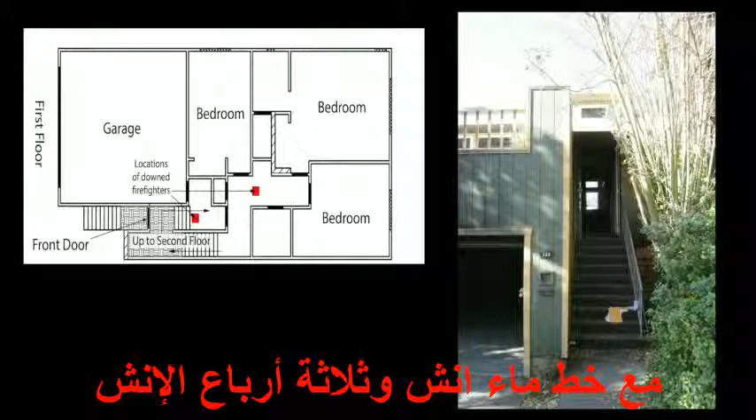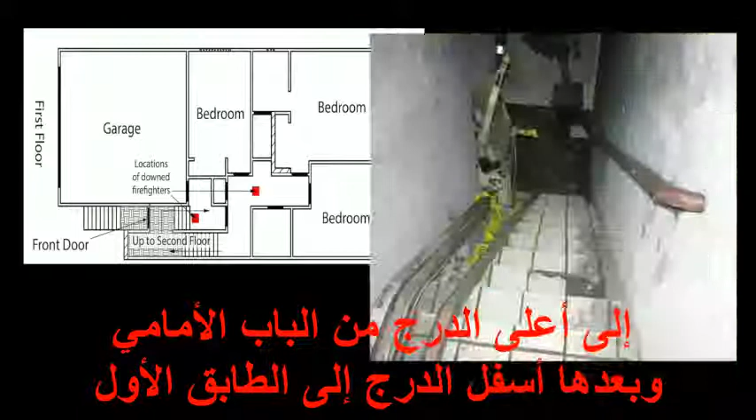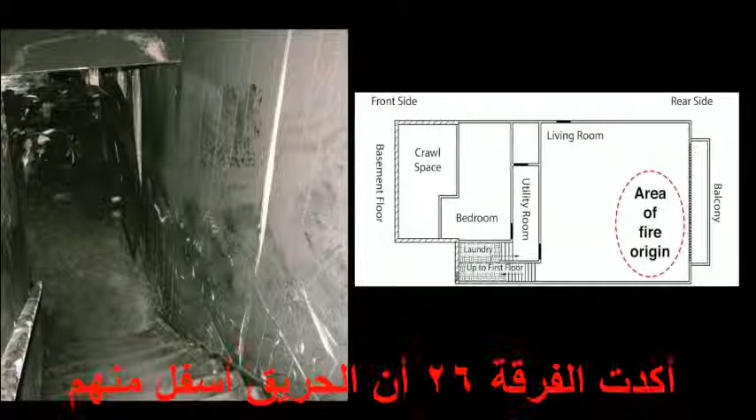At approximately 10:54, about 6 minutes after the arrival of Engine 26, Battalion Chief 9 followed the Engine 26 hose line up the front stairs, into the front door, and then down the stairs to the first floor or street level of the house. Battalion Chief 9 had a face-to-face discussion with the victims. During this discussion, Engine 26 confirms that the fire is below them, and Battalion Chief 9 indicates that the attack will be made from the basement level on the B side. The battalion chief exited the building.

Engine 26 remained in position near the top of the stairway leading into the basement. This was the last communication with the Engine 26 crew members inside of the structure.

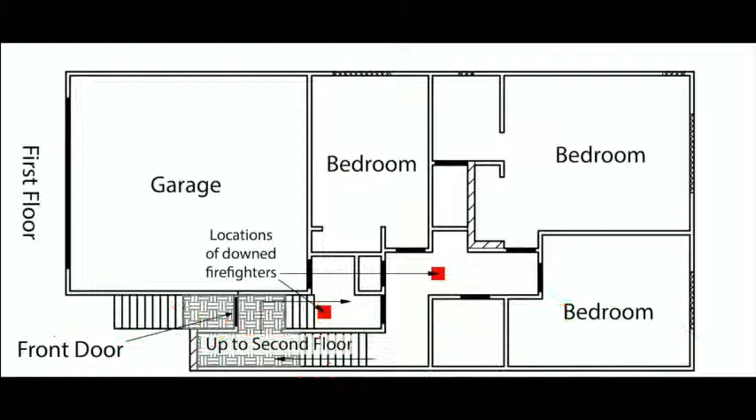Within 11 minutes of Engine 26's arrival on the scene, the large windows that made up most of the Side C wall of the basement level began to fail due to heat from the fire. As the windows broke, fresh air mixed with hot fuel-rich gases in the basement, which increased the heat release rate of the fire. The increase in heat release rate resulted in the rapid failure of the 6 window panels. It took less than 2 minutes for all of the windows to fail.

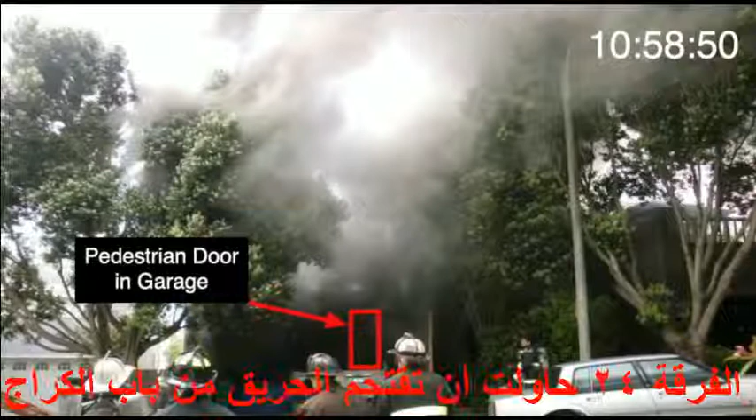After the rear basement windows began to self-vent, Engine 24 and Rescue 1A tried to make entry through the pedestrian door in the garage to attack the fire, but they were forced back by extreme heat and heavy black smoke. With the pedestrian door between the garage and the first-floor hallway open, heavy black smoke began flowing out of the open garage door at street level on Side A.

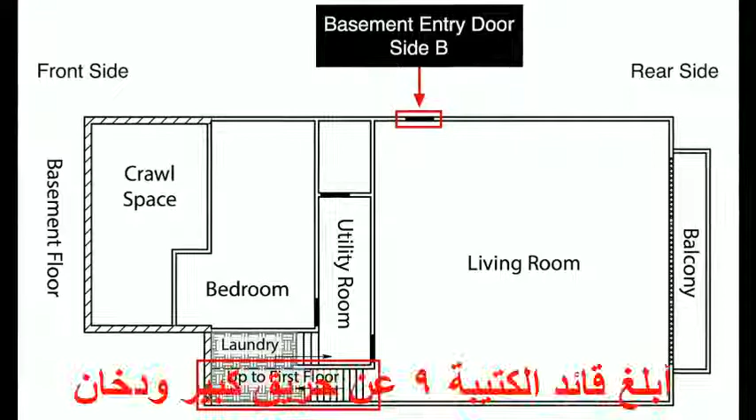Within a minute of this change, the Side B door on the basement level was forced open. Battalion Chief 9 reported heavy fire and smoke. Engine 11 tried to make entry into the basement, but they were forced back by the heat. Battalion Chief 9 requested a second hose line.

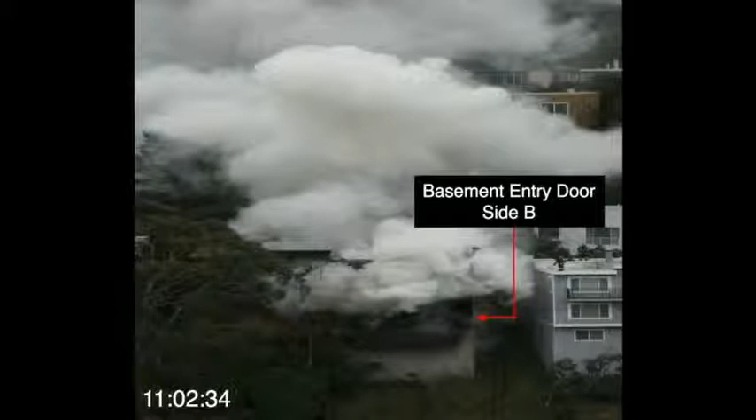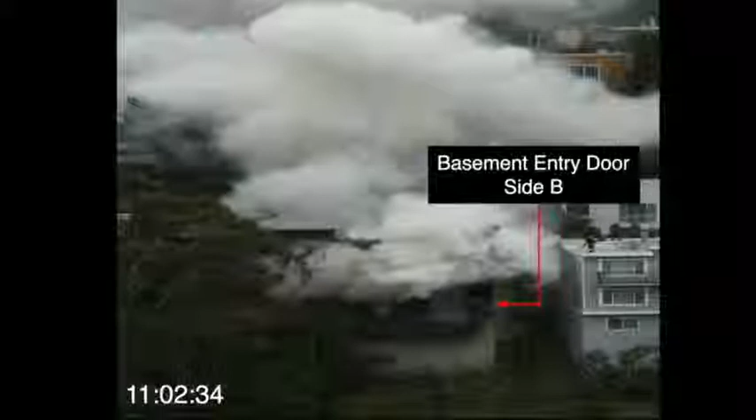Incident Command attempted to contact Engine 26 several times via radio, with no reply. By 11:02, both Engine 11 and Engine 32 had made entry through the Side B door into the basement and initiated suppression operations. At approximately 11:08, the lieutenant and firefighter paramedic from Engine 26 were found in the first-floor hallway between the top of the stairs from the basement level and the door to the garage. Both of the Engine 26 crew members died of their injuries sustained in the fire.

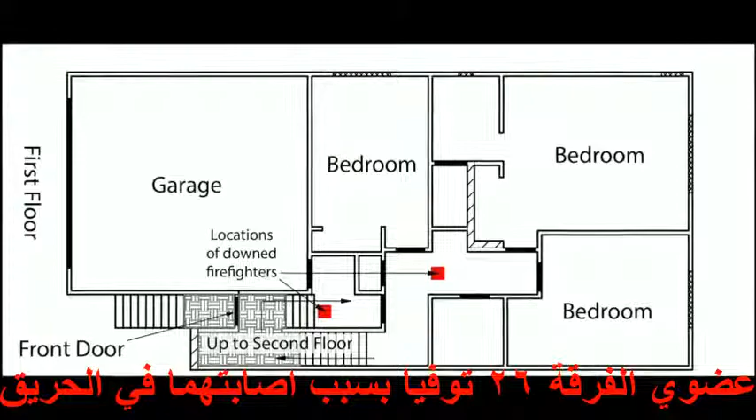NIST's Fire Dynamics Simulator, or FDS, was used to provide insight into the dynamics of this structure fire. The results of an FDS simulation are visualized with another NIST program called SmokeView. The inputs and details for the FDS simulations are documented in NIST Technical Note 1856.

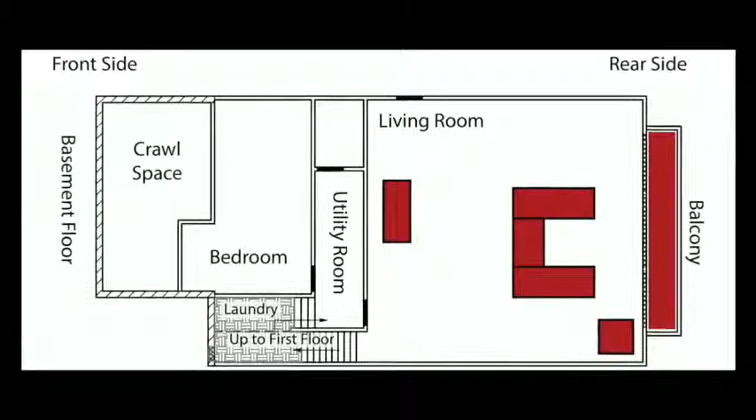The fire started in the basement, near the balcony windows on the rear of the structure. The fire spread to a large sectional sofa in the center of the basement living room area. Based on an assessment of the fuel load in the burned area of the basement, the estimated peak heat release rate of the furnishings and interior finish was approximately 20 megawatts.

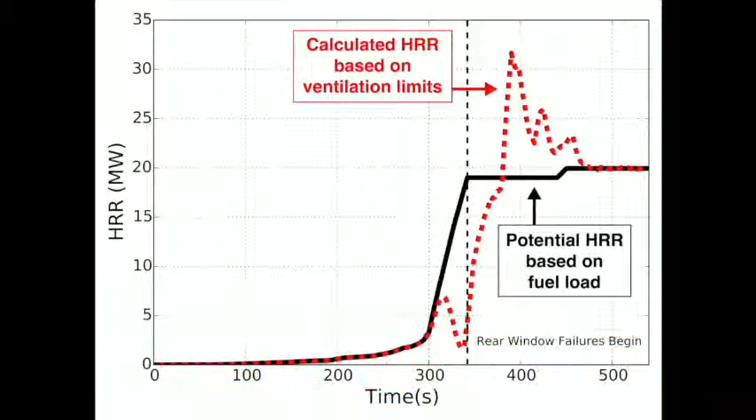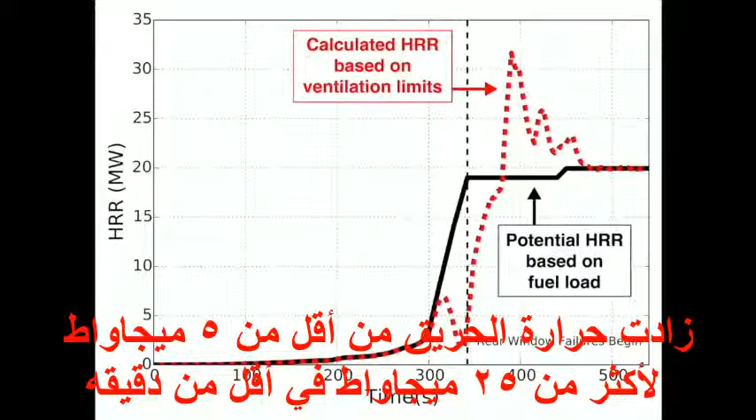However, the lack of oxygen limited the fire growth until the rear basement windows vented. As seen in the heat release rate graph, after the windows failed and allowed additional oxygen to mix with hot fuel gases in the basement, the fire rapidly increased from less than 5 megawatts to more than 25 megawatts in less than a minute after the first window self-vented.

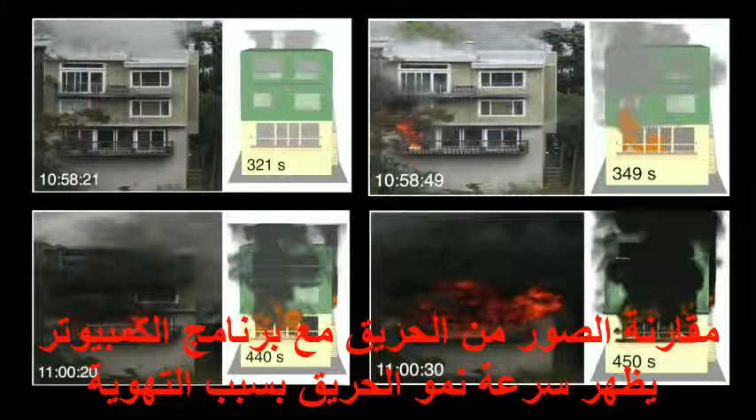The comparison of photographs from the incident and images from SmokeView shows the rapid fire growth initiated by the uncontrolled ventilation of the rear basement windows. The photographs show the fire incident time, while the SmokeView images show the simulation time. The comparison of a photograph from the incident and from the simulation shows the condition on the front side of the house at street level, as the rear basement windows were self-venting.

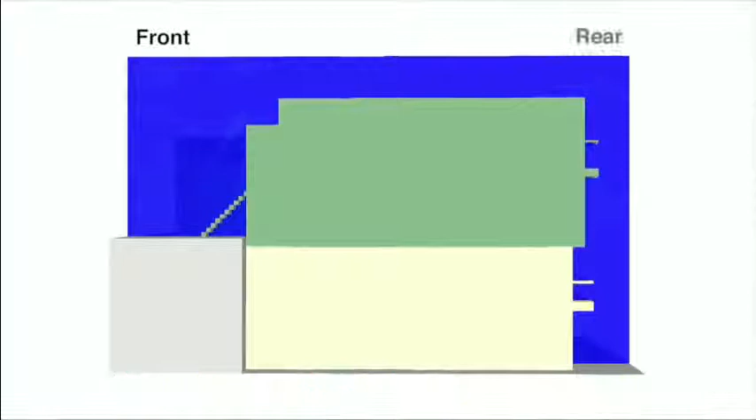Now we will use output from the simulation to understand the flow path within the multi-level structure. Fire gases move from regions of higher pressure to regions of lower pressure. This video shows the pressure plane along the center of the stairway, from the basement to the laundry room landing between the basement and the first floor.

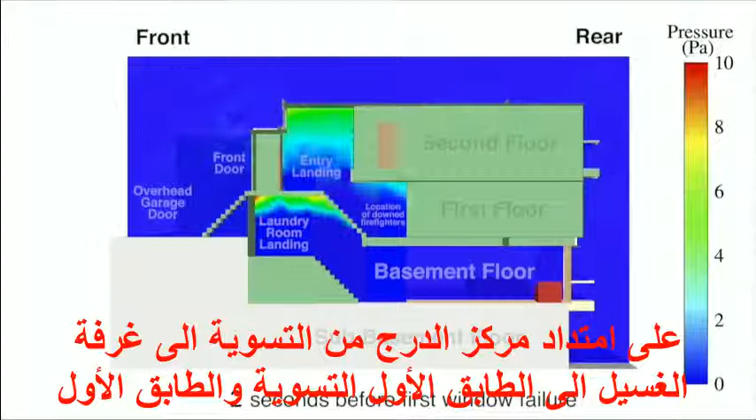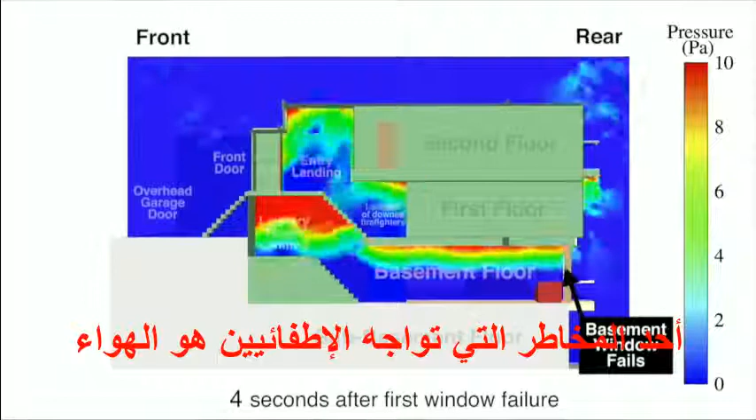An estimate of the pressure increase is shown before and after the first basement window failed. This video shows the pressure plane along the center of the stairway, from the basement to the laundry room landing between the basement and the first floor, with an estimate of the pressure increase shown before and after the first basement window failed.

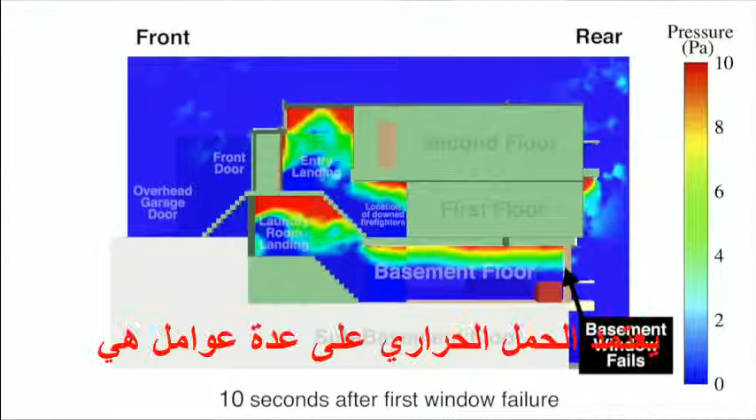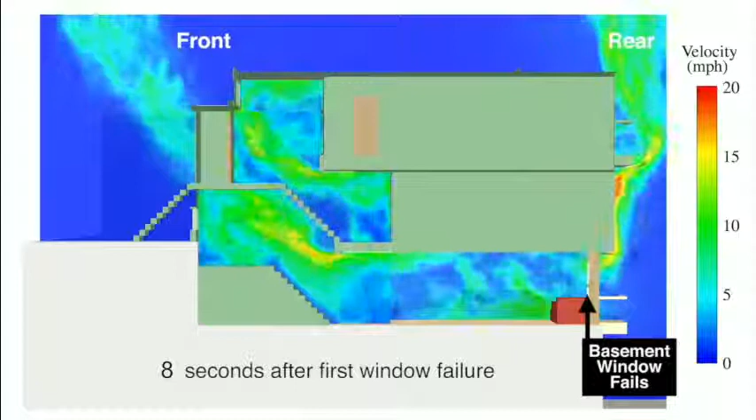One of the hazards to firefighters located in the exhaust portion of the flow path is convective heat transfer from the fire gases. Convective heat transfer depends on the velocity, the amount of turbulence, and the temperature of the fire gases. This video shows a comparison of gas velocity estimates in the stairway before and after the basement windows self-vented.

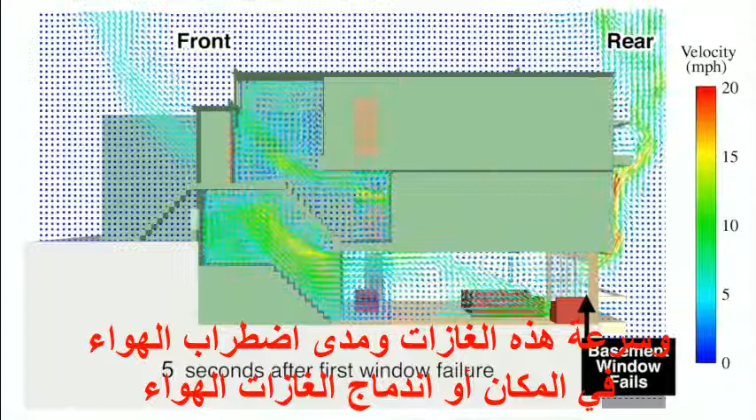Another way to visualize velocity with Smokeview is by using arrows or vectors. In this video, the vectors show both gas flow direction and gas flow speed. This is also representative of the amount of turbulence or mixing within the flow path. Notice the gas flow circulation pattern on the landing, which indicates a very turbulent or well-mixed flow.

This video shows the calculated change in gas temperatures as a result of the fire's rapid increase in heat release rate before and after the windows self-vented.

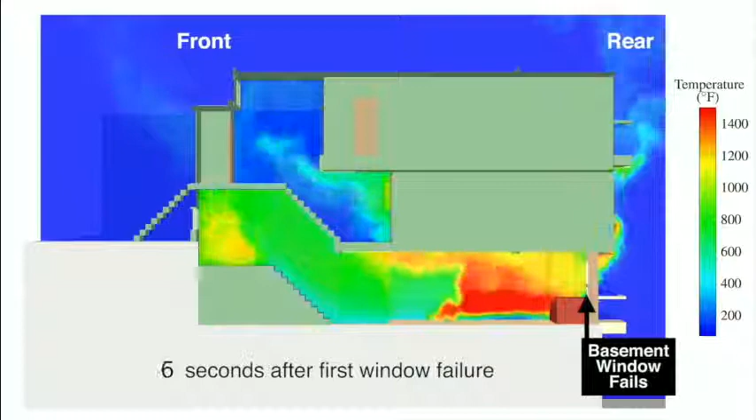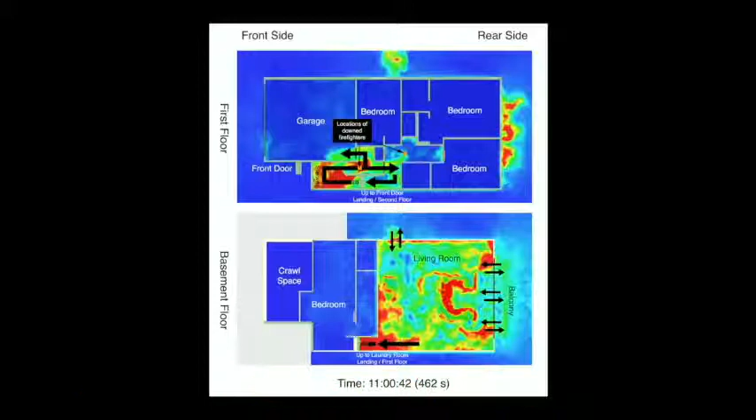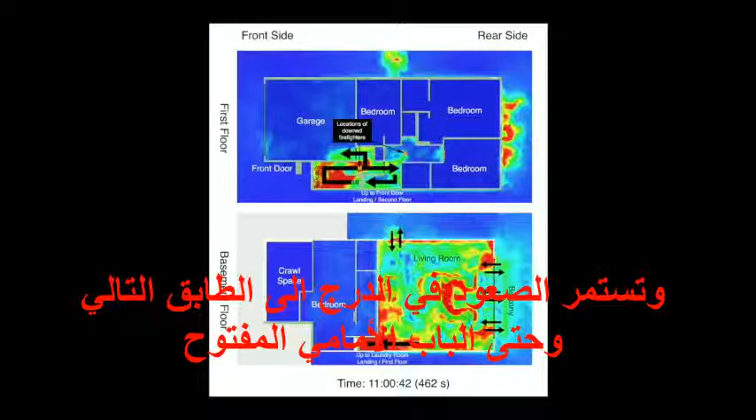These images show the flow path from the fire on the basement level 2 minutes after the first basement window failed. At this time, all of the rear basement windows have failed. The hot gases in the basement are flowing up the stairwell, then splitting on the first floor, with some of the flow continuing up another stairwell to the open front door, and the rest of the hot gas flow moving out of the open pedestrian doorway through the garage.

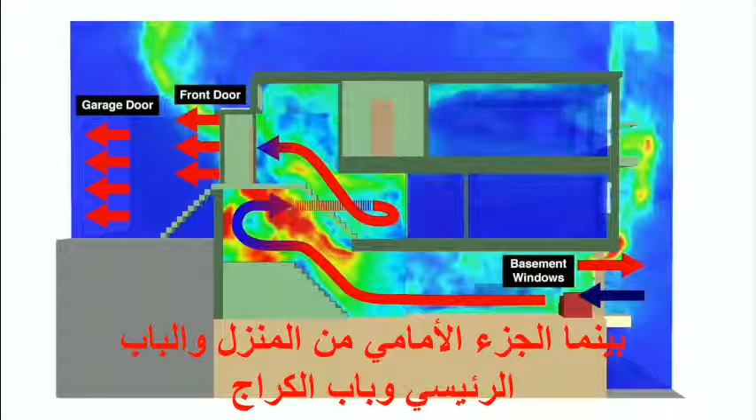Notice that the open basement windows on the rear of the house serve as bidirectional vents, with fire gases exiting the upper portions and air entering the lower portions. While on the front side of the house, the front door and the door to the garage are unidirectional vents, serving only as an exhaust for the fire gases.

There have been many previous fire incidents in which changes in the flow paths have had an adverse impact on firefighter and occupant safety. Fires with rapidly developing or changing flow paths are a significant hazard to firefighters.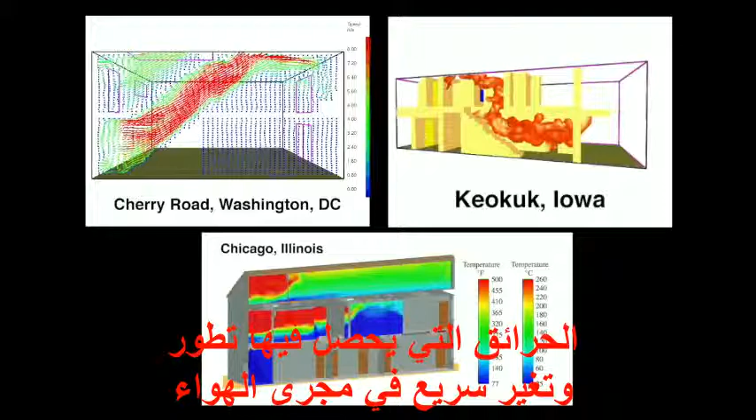The development of a flow path could be caused by the failure of a component of the structure, such as a door, window, or portion of a ceiling, wall, or floor.

Environmental conditions, such as wind, can generate hazardous thermal conditions within a flow path. Stay upwind of the fire or keep the wind at your back. Uncoordinated ventilation or uncontrolled doors can also be the cause of increased thermal hazards within a flow path.

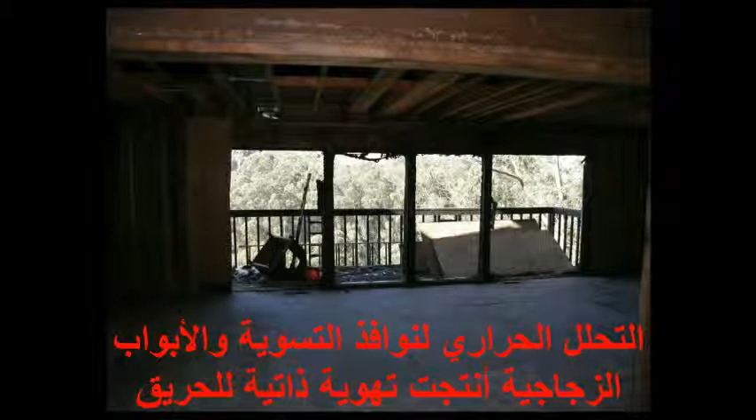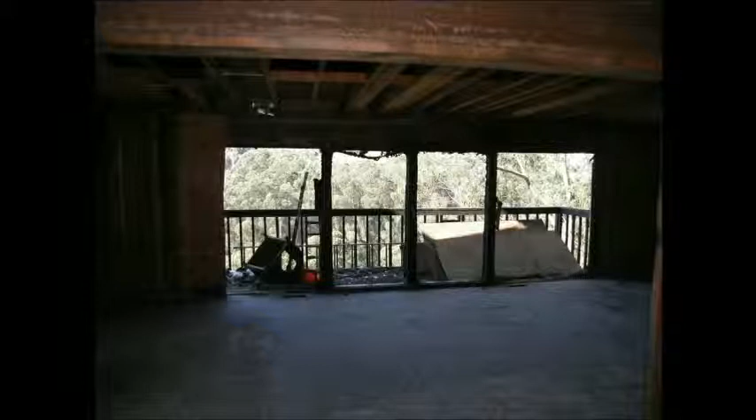In this fire incident, the thermal degradation of vinyl-framed windows and sliding glass doors resulted in the self-venting of a wall of windows 19 feet wide on the rear basement wall. The window opening allowed hot gases to flow out of the windows and mix with oxygen, which enabled the fire to spread up the rear of the structure.

Oxygen entrained into the structure enabled additional fire growth in the living room area of the basement. Failure of the rear windows resulted in a rapid increase in temperature, velocity, and mixing of the fire gases in the stairs and the first floor hallway. Conditions changed from tenable to untenable within seconds.

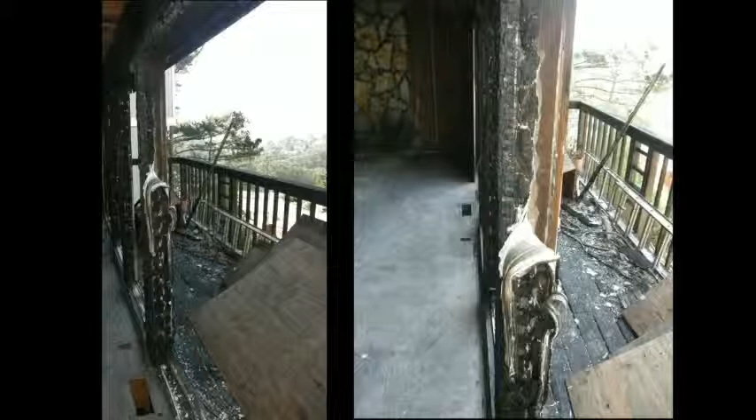Prediction of the failure mode and failure time of a building component is not a reasonable expectation given the large number of unknowns that firefighters face on the fire ground.

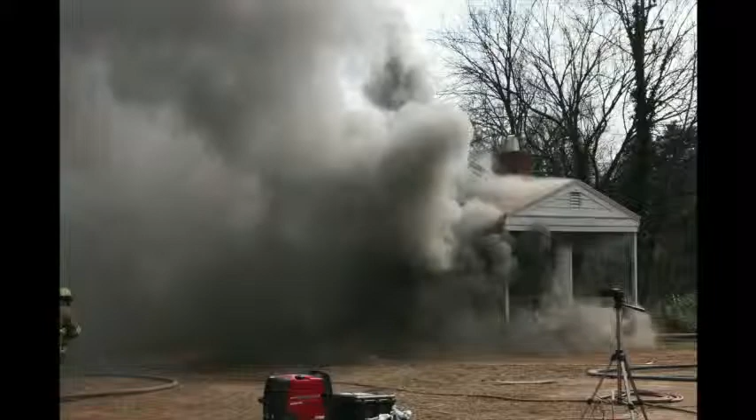Research has been conducted by NIST and UL with fire departments across the country on exterior fire attack. The studies have shown the importance of scene size-up prior to beginning interior fire operations in order to choose tactics that would not only be the most effective, but also increase the safety of the operations.

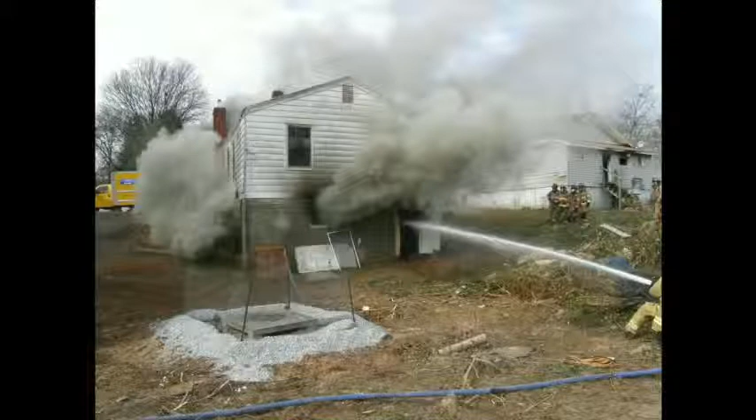The experiments in single-family homes have shown that once the basement fire was located during size-up, the most effective fire attack was made from the same level.

When sizing up a structure fire, choose your tactics with potential flow paths in mind. Recall that in a flow path, the hot gases move from a region of higher pressure to a region of lower pressure. Firefighters located in the flow path downstream of the fire can be exposed to lethal levels of heat.

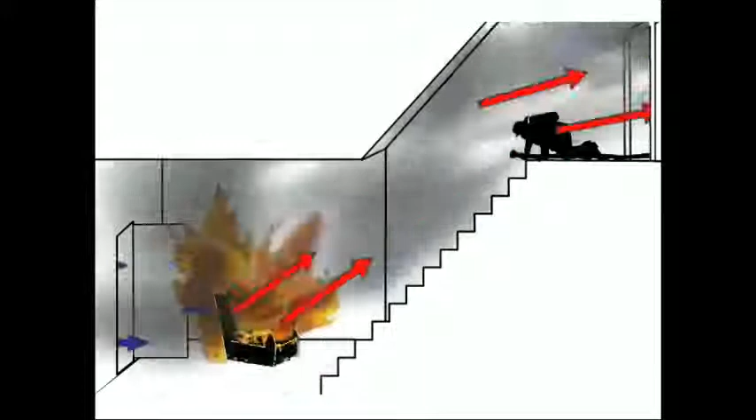Firefighters positioned in the flow path above the fire are in a high hazard and potentially deadly location. It is critical that tactics are chosen so firefighters are not caught in this position.

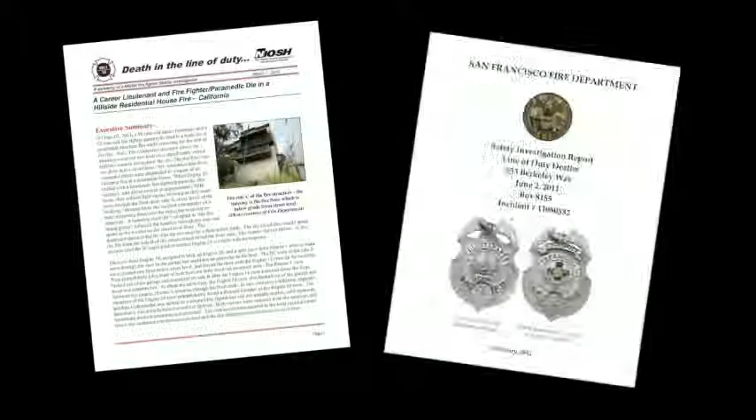For more information on this incident, see NIOSH Report 2012-28, San Francisco Fire Department Safety Investigation Report, Incident 11060332, and NIST Technical Note 1856.